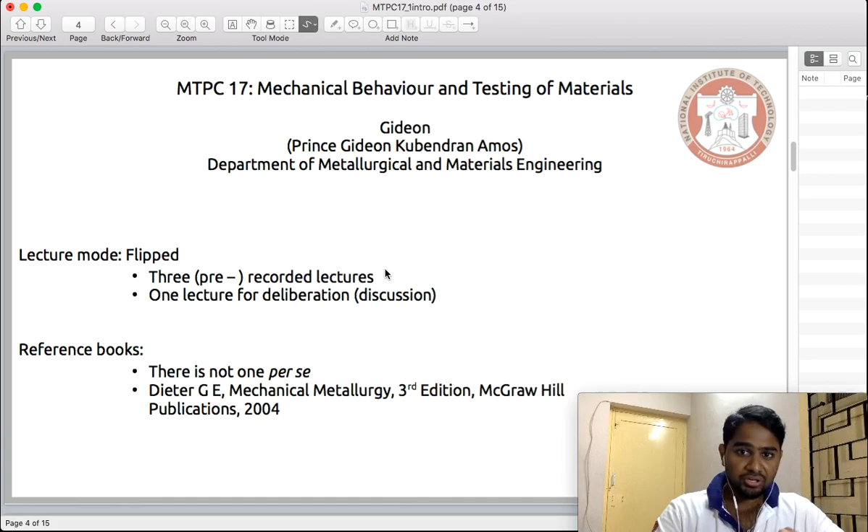Now, like I said, this book has been around for a while, and even when I was an undergrad, long ago, I was also recommended this book. And what I personally felt is that in certain areas, the contents of this book were rather expansive, and in certain areas they were rather introductory. So in case of the latter, you might have to look for other sources in order to get an in-depth understanding. Before going into how we would be journeying through this course, I just wanted to make one thing clear.

That is, I'm not quite comfortable with the title mechanical behavior, or not the entirety of the title, but the part mechanical behavior. The reason is a wide range of behavior, or the way a material behaves, can be categorized as mechanical, or one can argue that certain ways the material behaves can be categorized as mechanical behavior.

One prime example is, supposing you have a rod. Let's say it's made up of a plastic material, wherein the melting point is pretty low. And now you begin to heat this rod, and what you begin to see is the rod begins to lose its structural form, and the shape begins to change. So you end up having something like this. So the shape is lost now, and the original form it had, that is the form of a cylindrical rod, is lost now, and it has seemingly deformed.

And now, instead of stopping your heat source, you continue heating it, and ultimately this rod, because of its low melting point, melts and just spills around. Now, one could argue that this behavior can also be viewed as a mechanical behavior. You have a strong solid rod which loses its structural form, and since you continue heating it, it ultimately loses its shape, structure, and physical form, and becomes a liquid. Why not call this a mechanical response or mechanical behavior of a material? That could be an argument made for this behavior.

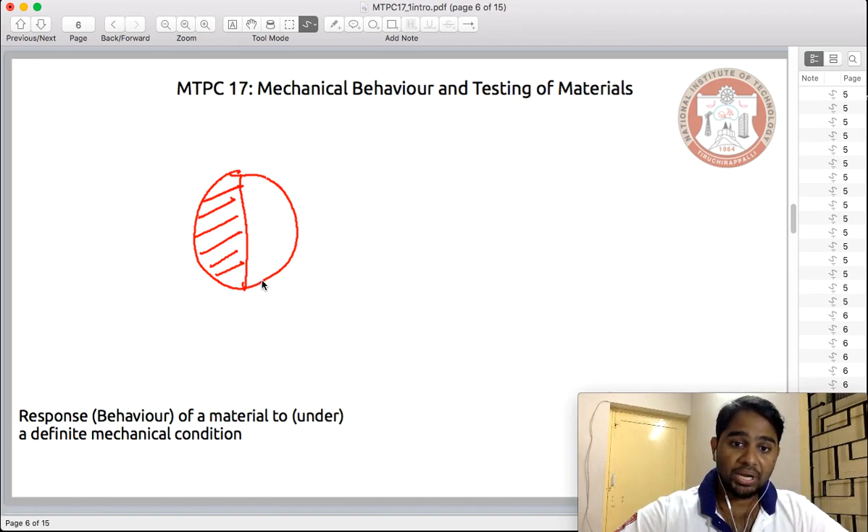Another example is, supposing you have a polycrystalline material. I hope you have heard this term, polycrystalline material, or if not, there is nothing much to it, like if you have two separate crystals that are joined together, a bicrystal material. So let's consider a microstructure of such a bicrystal material. This microstructure is separated by an interface that separates one crystal from the other. One crystal is characterized by an atomic orientation, which can be represented by lines like this. So this forms one crystal, and there is another crystal whose orientation of atoms is represented by lines like this. Now you have a bicrystalline microstructure.

And now when you heat such a bicrystalline setup, the interface which separates the two crystals begins to move in order to reduce the overall energy of the system. And when this interface moves, the atoms which were originally aligned in this direction tend to realign themselves in this direction. So atoms mechanically change their position and align themselves in this direction. And there can also be an argument made here, why not call this a mechanical behavior?

Now, in the context of our course, we don't refer to this or the previous example of the melting of a rod as a mechanical behavior. The reason is this. When one talks about the mechanical behavior in the context of the realignment of the atom, the mechanical aspect is confined to the material. Let me reiterate. The mechanical behavior of the realignment of the atom is confined to the material. But in our course, the mechanical aspect is introduced to the material from an external source, and we will be studying the response of the material to this external mechanical condition which is imposed on the material.

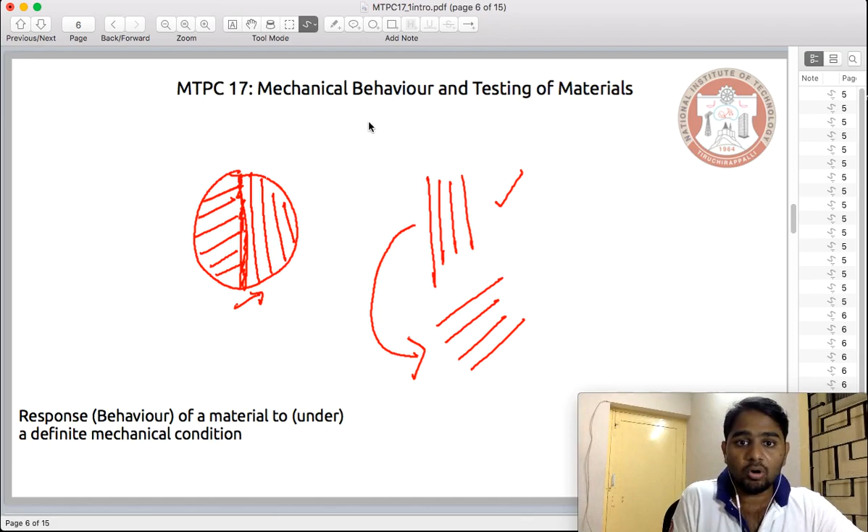So when it is said that we will be studying mechanical behavior, what is actually meant in the context of this course is we will be imposing a mechanical condition on the material and studying how the material responds to it. It is not how mechanically the material changes. And that is what we mean by the mechanical behavior of material, and that is what is being written here. So to give a gist, mechanical behavior is nothing but how a material responds when you impose a mechanical condition on it.

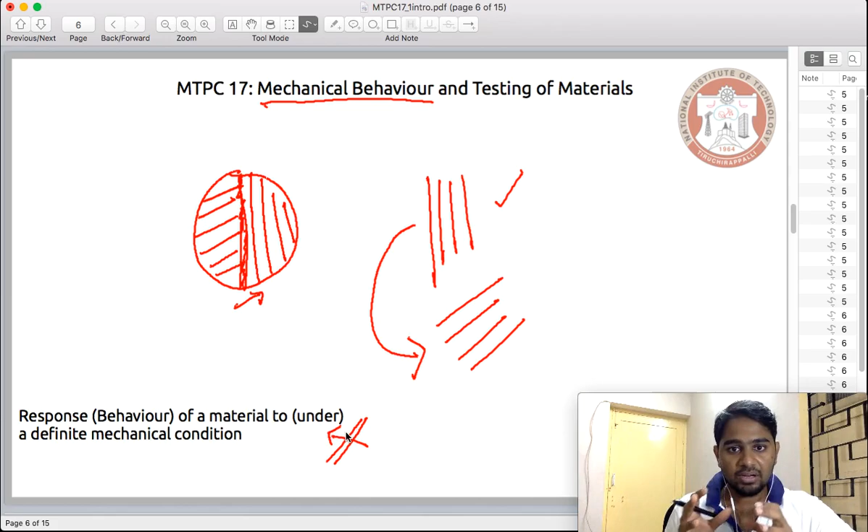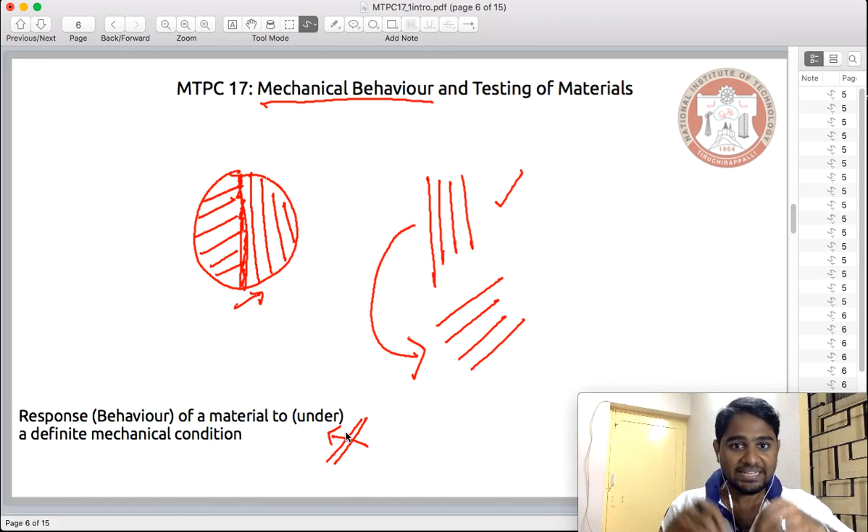So the term mechanical is not implicitly associated with the material, but rather it is characteristic of the condition you impose on the material. I hope you understand that. And this is what differentiates the mechanical behavior given in these two examples, the melting and the realignment of the atoms, from the mechanical behavior that we will be studying all through this course. All through this course, we will be imposing a mechanical condition and studying the response of the material to it, not the internal mechanical behavior of the materials.

Okay. Now, hopefully having clarified that, if you have any questions, again, please do let me know. I would like to clarify that before we proceed to the actual course, or before we move away from the introduction part of this course. So please do let me know.

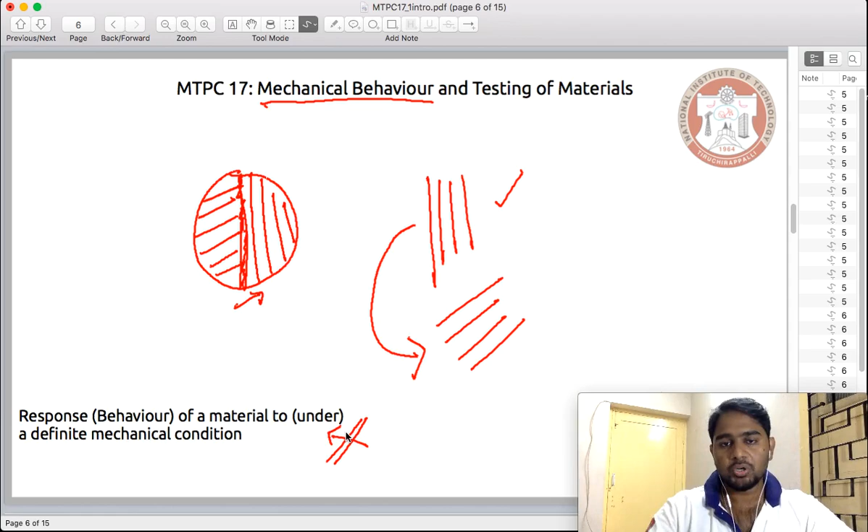So once you understand what we are going to study or what the title actually means, then we can move ahead and see how I have formed a module for this course in order to journey through the lectures. Now, this whole course has been split into 7 modules. And before discussing what these 7 modules are, I would like to take a close look into the title of this course, again, which comprises of the term mechanical behavior, testing, and materials.

So this title has 3 components to it. One is mechanical behavior, which, like I said in the previous slide, is characterized by the conditions that we impose on the material. We will be imposing a mechanical condition and we will be studying a response to it. There is a second component, which is testing, and there is also a third component, that is materials. Now once you see there are 3 components to the title, it will be easy for me to explain what these 7 modules are.

Now to begin with, the first module is, as you would expect, the introduction, wherein I intend to introduce you to certain terminologies. These terminologies are not something that you will be using in your daily life, but once you learn them, it will make you sound more knowledgeable, or someone who actually knows what he is talking about. So those terminologies we will be discussing as a part of the introduction.

And on top of it, I plan to introduce some historical perspective, because this research or this discussion of mechanical behavior and testing has been around for a while now, and we are a part of a very huge journey, and it is often nice to see where we are as a part of the journey. So I plan to introduce some historical perspective, just to see where we stand and to get a feel for the subject.

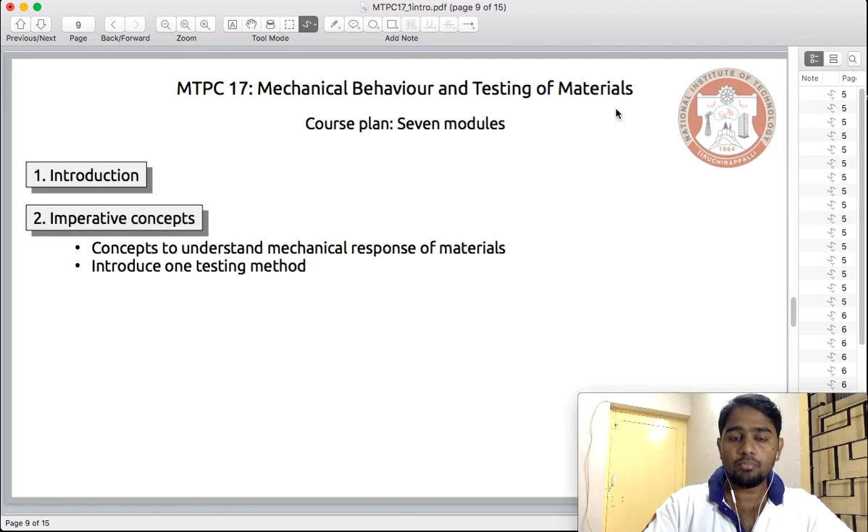And now, once we are fairly familiar with these concepts, and we are able to quantify the behavior and also the different forms of the mechanical conditions, then we can move ahead and understand how the behavior of materials actually happens, or what propels the behavior of the materials that we see in the physical world. What the third module entails is that when you impose a mechanical condition on a material, there is of course some way the material behaves, which we see through our naked eye. But this behavior is actually underpinned or propelled by something that is happening in the ground below, that is at the microscopic and the atomistic level.

And in the third module, we will be looking into what actually governs the behavior we see at the macroscopic scale or through our naked eye. It will be a bit more interesting because you will get to learn several new things in this module. Even though the first two modules might be rather a reiteration for a few of you, in this module new concepts will be introduced. If you are someone who is more interested in the theoretical aspect of mechanical behavior, you would very much love this module.

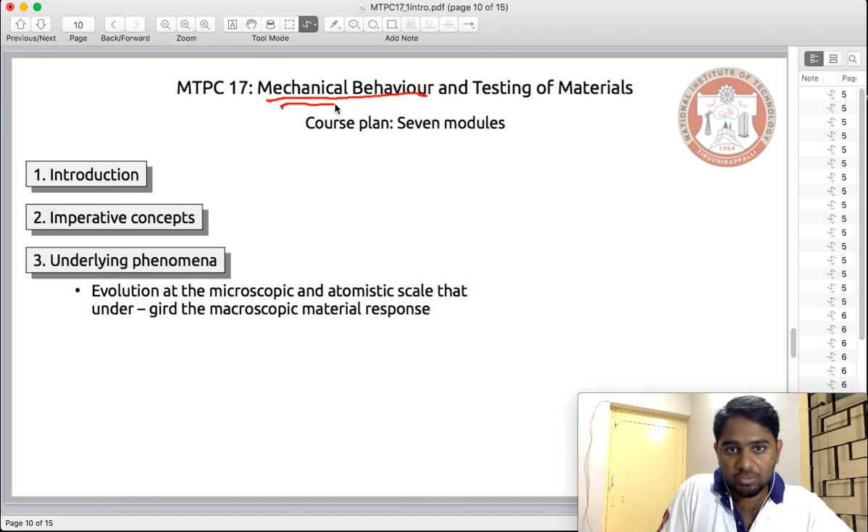And once we get through all these introductory concepts and the underlying phenomena, which would all deal with the mechanical behavior part of it, then we can go to the second part, which is the testing. We can then understand the different techniques of testing a material.

Through the concept, we would have already introduced that there are different ways to quantify the mechanical conditions that we impose, and based on these concepts that are used to quantify, we would then devise different testings, and we understand how these materials respond to these different setups or different testing conditions.

The reason one might want to look for different testing modes is because in real life the materials do not experience one mode of mechanical conditions, so we want to get ourselves acquainted with different loading conditions or the different mechanical conditions, and that is the reason why we look for different testings. Those testings, as a survey, would be introduced in this module.

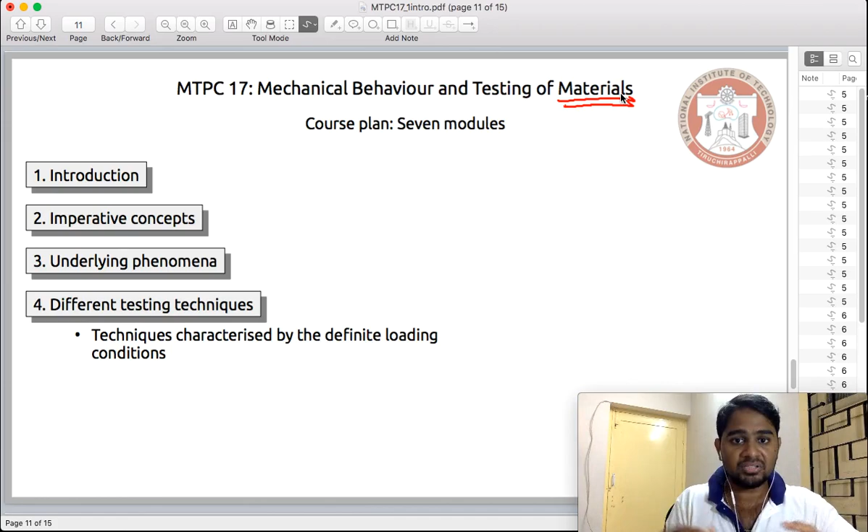And now, like I introduced to you in the slides before, the title itself comprises three components. One is the mechanical behavior, the other is testing, the third one is the materials. We cannot confine ourselves to one group of materials, meaning we cannot study the behavior or the testing of just metals alone. We have to expand our horizon. And so in the subsequent modules, we will be considering materials other than metals or alloys. So to begin with, we will start by considering ceramics.

We will see what is fundamentally different in ceramics, how they behave under different mechanical conditions, and the reason that makes them behave in that way. And once we are fairly acquainted with that, we will move to other materials like polymers and composites. So the way we would deal with all these different materials other than metals, which I believe you would be introduced to in your other introductory courses, is that we will see what makes them different from all the other materials and how these differences enable them to behave in a different way when the same kind of mechanical conditions are imposed on them.

And once we are able to understand their responses, then we ourselves will be able to evaluate in which conditions they would be more advantageous to us and in which conditions it is better to avoid them in order to avoid a catastrophic failure. As a metallurgical engineer or materials engineer, if we are not able to do great things, one thing that is expected of us is to avoid a catastrophic failure. So one of the reasons for including materials in this title is that we can look into these different materials and at least understand under which conditions these materials fail miserably.